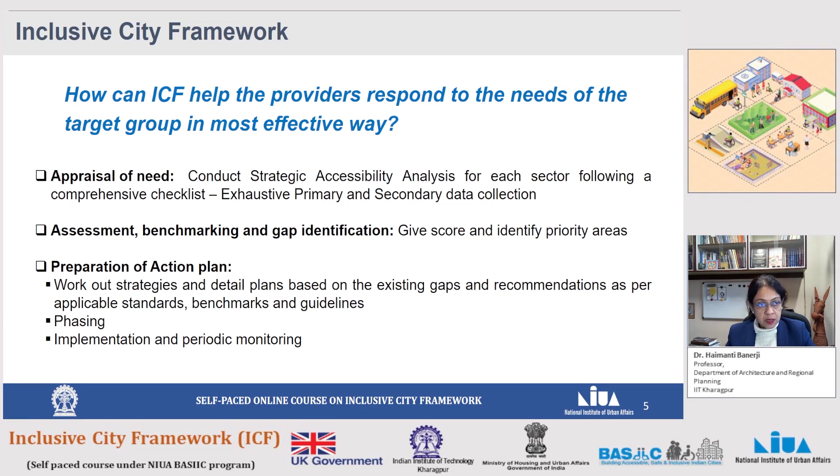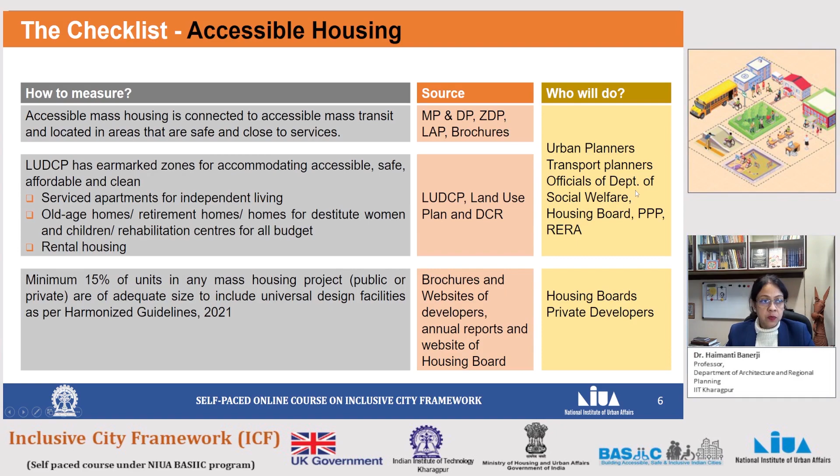Next, the issue of special cells or designated officials at the urban local bodies and at ward level for helping people regarding matters like house renting, buying, and allied services for vulnerable groups. This information will be available with the ULB officials. Also, if someone wants to be aware of specialized schemes and subsidies, that may be informed by the ward officers.

The next sector is availability of accessible water and sanitation facilities, WASH facilities, which need to be accessible, and the public health engineering department officials can help in providing information related to this.

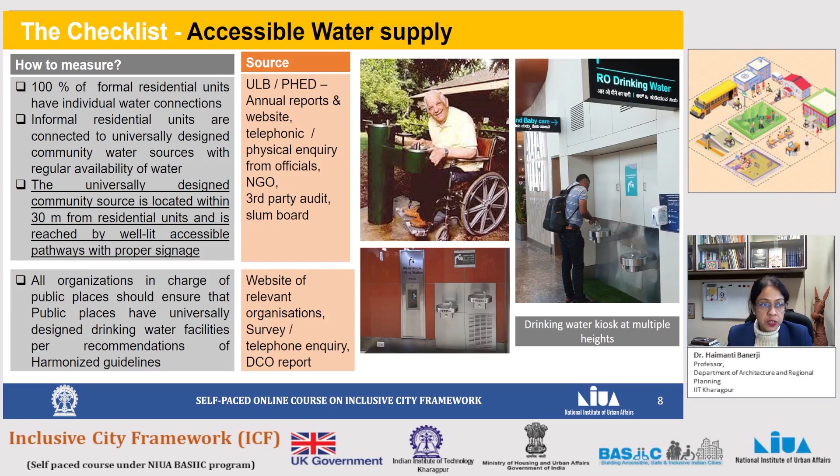Please note that this framework tries to be inclusive in all respects. That is why the accessibility of water for informal residences has also been considered through an indicator: the universally designed community source is located within 30 meters from residential units and is reached by well-lit accessible pathways with proper signage.

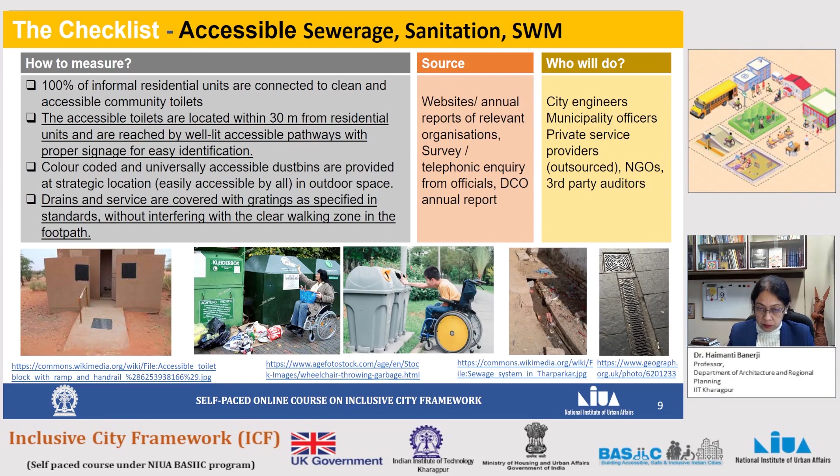Similarly, for accessible community toilets. Coming to solid waste management, formal residential units have access to a door-to-door solid waste collection system or accessible garbage chutes at each level in case of apartments.

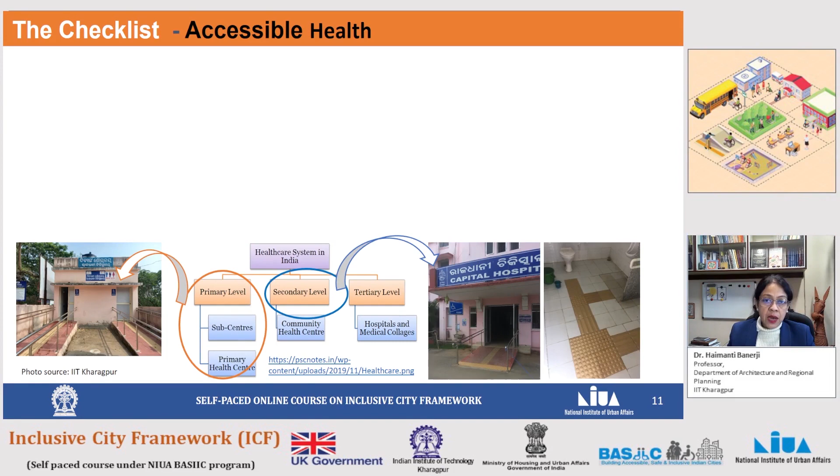We would like to highlight one thing: there are certain indicators which we feel are mandatory, and some which are aspirational.

The mandatory indicators are those with which we cannot make any compromise. For example, this indicator under health, that all levels of healthcare facilities are designed with universal access as per guidelines in URDPFI and harmonized guidelines, is a mandatory indicator.

Whereas it is desirable that PHCs equipped to handle basic treatment, diagnosis and trauma care are available at walking distance, that is within 1 kilometer, and connected through accessible pathways to the localities and the nearest transit points at neighborhood level. So this is an aspirational indicator.

The document has stressed the necessity of a service being made accessible, not only places. Hence this indicator of 24/7 services like doctor on call, ambulance on call, are available for vulnerable population including persons with disabilities. It may be noted here that for getting some information, primary data collection can be the only option, like simply calling the respective organizations and finding out the details.

Same is the case for educational facilities, where stress has been given on physical accessibility as well as policy level accessibility.

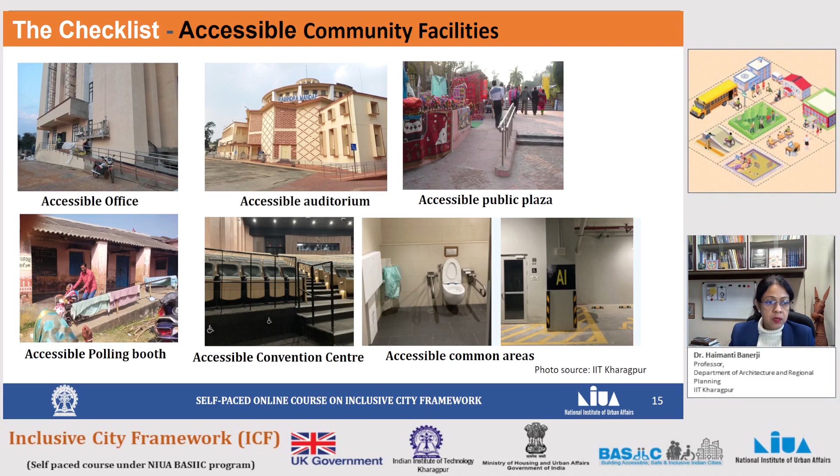These are some sources of data collection which might help you in the process, including primary sampling, information from the Disability Commissioner's Office, municipal authorities, housing boards, health departments, district education officials, and CREDAI, which is a private sector source for housing related information.

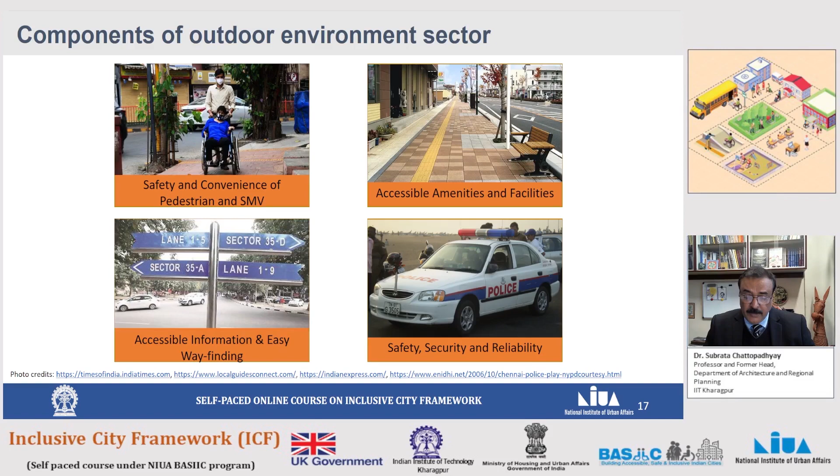Next, if we take up Sector 2 on outdoor environment, indicators included are accessible footpaths on all city roads available as per IRC recommendations and harmonized guidelines, and separate cycle tracks on busy urban roads. This might require some in-person survey.

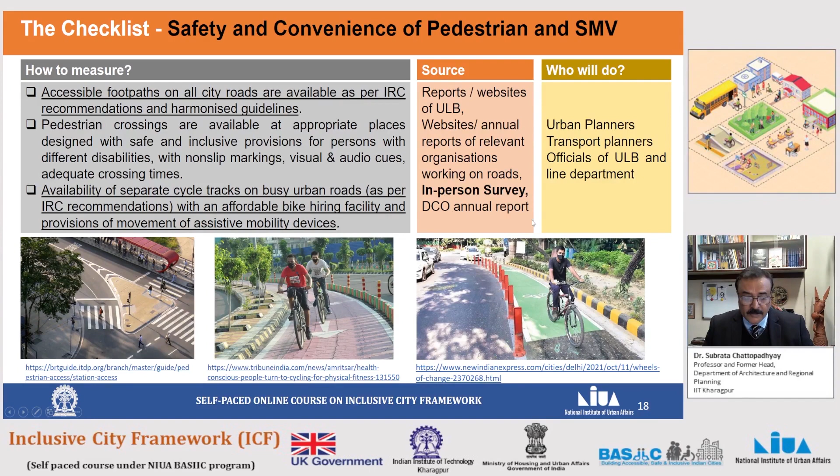Organizations like the Office of Disability Commissioner may be helpful in providing information related to availability of accessible, safe and clean amenities, including toilets, drinking water and seating in important public areas.

Availability of street signage as per design recommendation in IRC 67 2012 Code of Practice for road signs and harmonized guidelines is an important indicator which might again require reconnaissance.

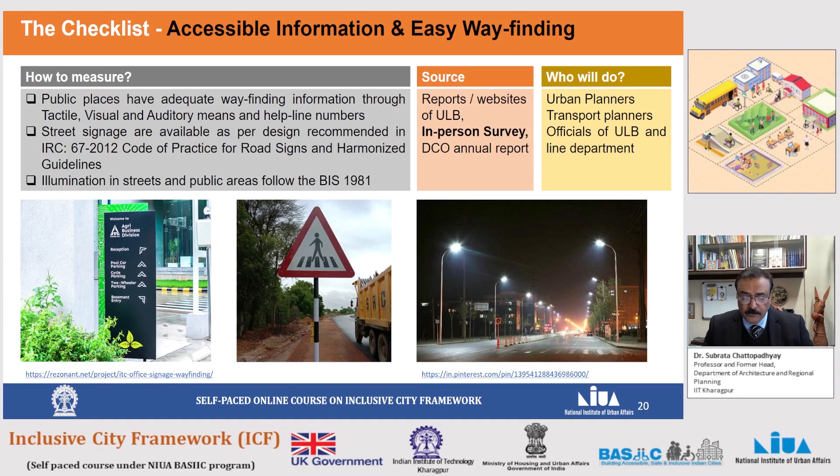Information from the police department may highlight the location of CCTV, whereas DCO may inform about availability of grievance and assault reporting officers who are sensitive to the needs of vulnerable groups. The sources are similar.

Next, Sector 3 on livelihood. The Employment Exchange Office and annual report of DCO will be the major sources of information for indicators like availability of a range of flexible options, formal or informal, for employing people from all vulnerable groups.

Then on accessible websites as well as accessible one-stop information centers, like in each ward, for related information. Additionally,

the basic requirements of making offices physically accessible and extending special services to employees belonging to vulnerable groups, like special transport organized by employers, can be obtained from primary sources.

The vocational training schools or centers for vulnerable groups may throw light on availability of job-centric training programs which are available for vulnerable groups.

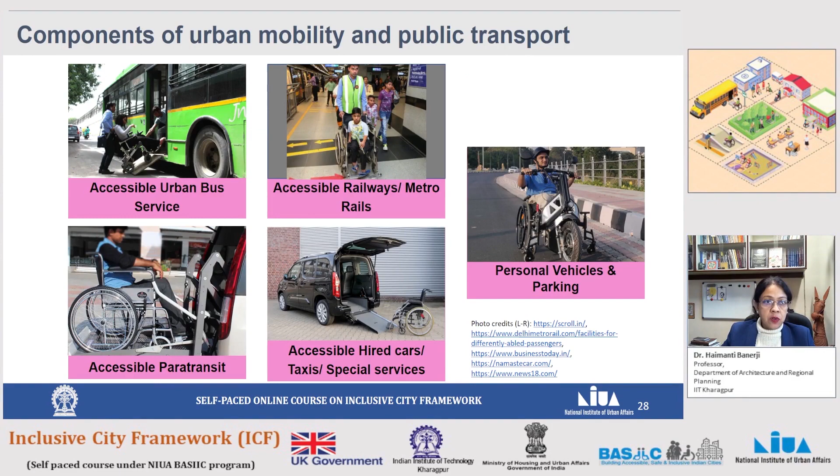Sources of data for the fourth sector, which is on transportation and urban mobility. This has an indicator on inclusive mobility plan which can be available within the ULB.

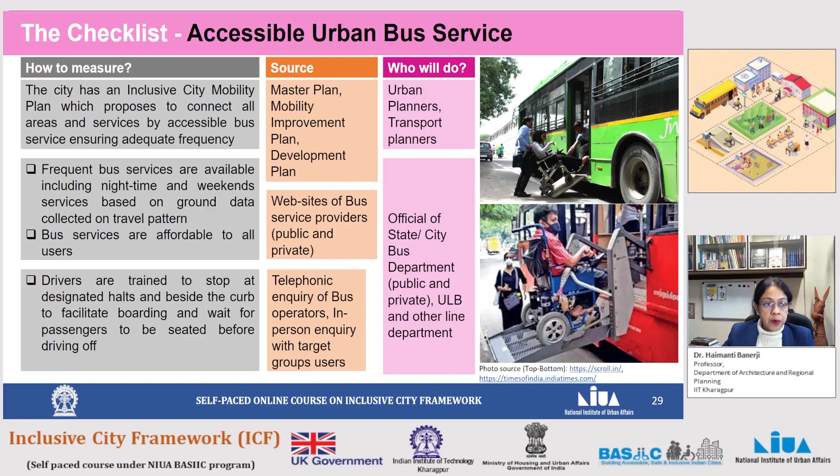Website of bus service providers, public and private, will give accurate information on frequency of bus services, including nighttime and weekend services, whereas an interview with the service providers can tell about the sensitization programs being organized for drivers and helpers.

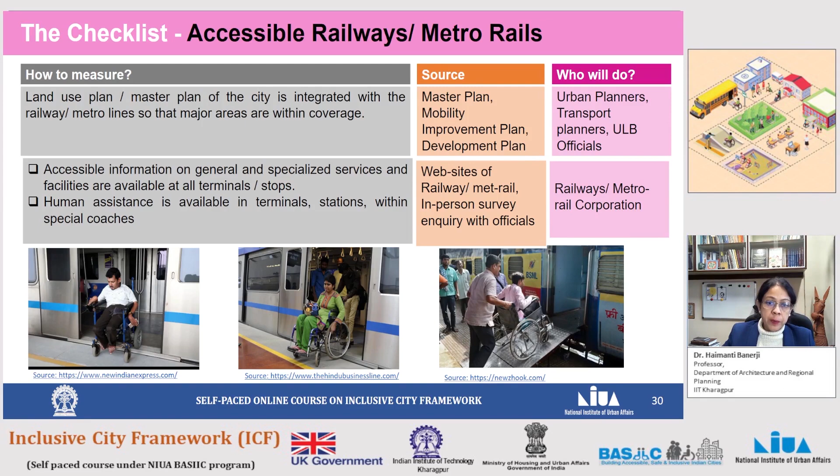Primary surveys here also may be required for assessing the nature of information available at stops and within vehicles, and also regarding availability of helping personnel at strategic locations.

Though the routes of paratransit facilities might be available from the mobility plan document, the accessibility features at notable paratransit nodes need primary survey.

However, the accessibility of booking apps and availability of accessible vehicles which can accommodate wheelchairs can be assessed by desk study.

Annual reports and websites and similar secondary information can be available on the sensitization attempts and programs. So these are the primary sources of information for the sector.

The next one is the fifth sector on IT connectivity, digitization, public participation and governance. A major component of this is accessibility of websites of essential urban services, which can be a desk study.

However, there is an indicator on availability of Wi-Fi facilities in selected public zones, and this can be obtained from ULBs. Whether there exists a special cell or department or official in the ULB who is looking after

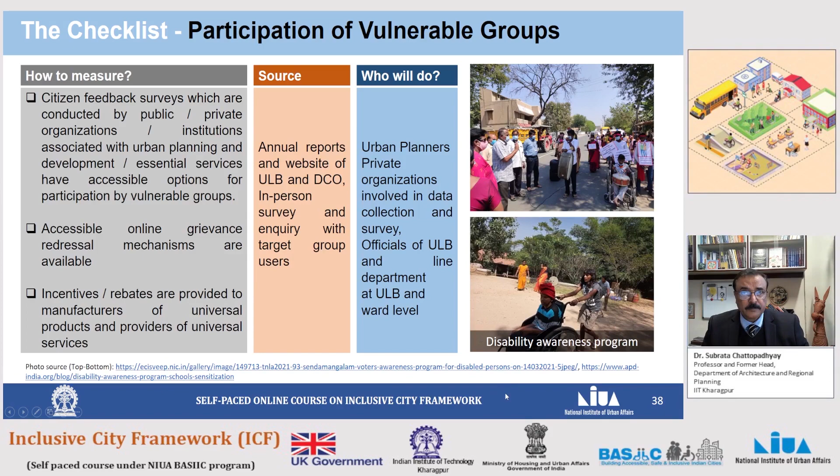Annual reports and websites of ULBs can give information on mechanism for collecting feedback from vulnerable groups and presence of online grievance redressal mechanism. We come to the sixth and final sector on recreation and tourism.

In this case, officials of the tourism department can give most of the information on the list of accessible tourist places and details about them, including available connectivity.

A study on websites of hotels and tour operators can tell about accessible tour packages which are available in the city. The Office of Tourism Department can also be a single point of contact in many cases.

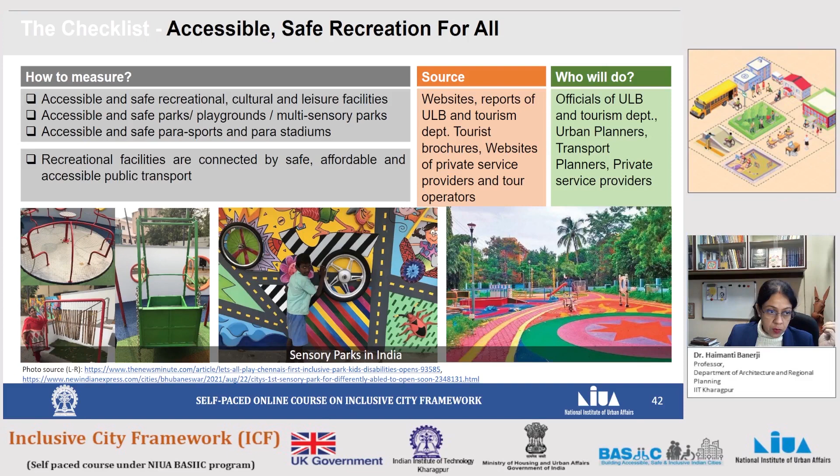Additionally, websites of private service providers will mention various recreational joints available in the city, their accessibility and connectivity. So, like previous sectors, these are the probable sources, similar.

Now, I'm sure this module has been successful in explaining how to fill in the checklist, which was our target, and conduct the strategic accessibility analysis exercise, since that is the most important and tedious part of the ICF.

All the participants are advised to download the ICF document from the NIUA website and refer to the checklist in detail. The document will also provide you two very important pieces of information which have been included as annexure.

A list of essential data which should be available with the city authorities, and the particular organizations who should generally be responsible for each type of data.

Second, a list of national and global guidelines and good practices which you need to refer to for preparation of sector-wise and pan-city action plans post the audit exercise.

Also, we have provided an exhaustive list of global and national good practices which can help you in understanding what has been done worldwide on these. Happy learning, all the best.